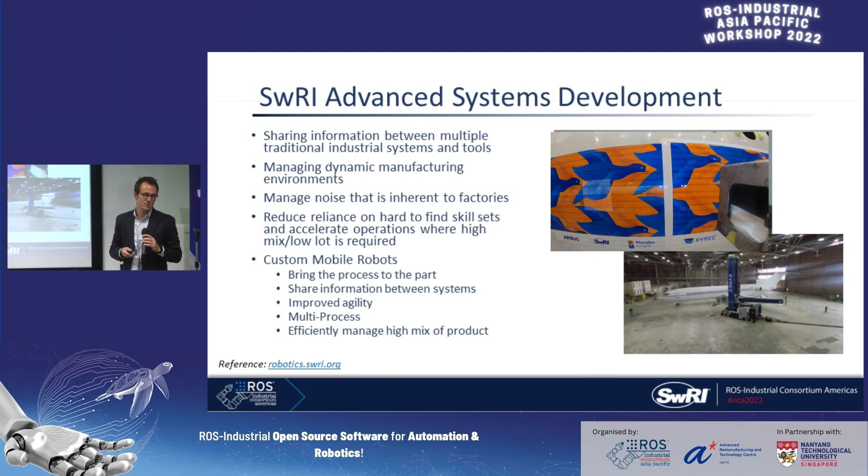like New Horizons. Relative to Southwest Research Institute and robotics, the group I work in focuses on advanced system development. You may have heard ROS-Industrial is 10 years old, and it was actually building a lot of these high-end and high-performing systems, or systems that have to do a lot of interesting things in dynamic environments, that led our group to investigate ROS as a solution. And that was actually the birth of the ROS-Industrial program.

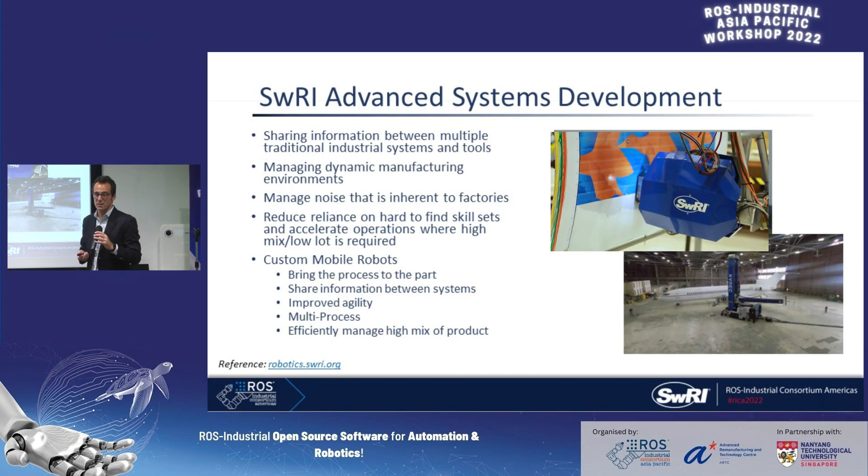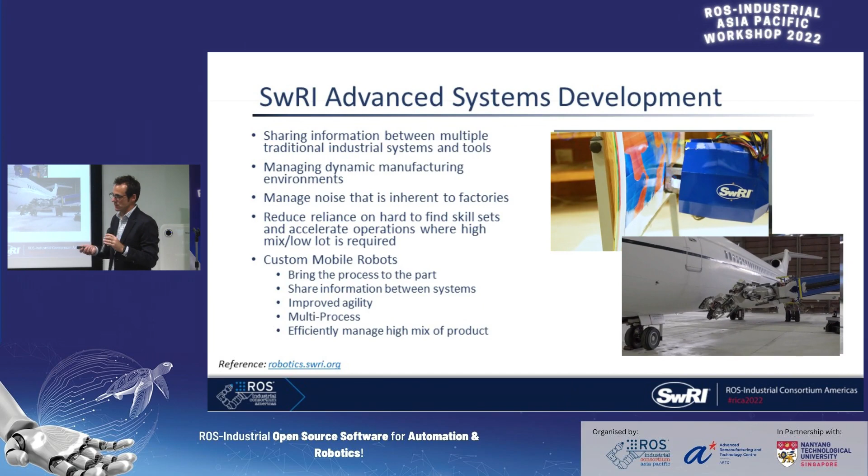So these are just a couple examples. Inkjet printing on aircraft surfaces, and this is laser ablation, basically coating removal for aircraft. It's basically a lot of the core work that our team does. We take advantage of the tools in ROS and give back as well. So we try to walk the talk, if you will. So that's what our team does.

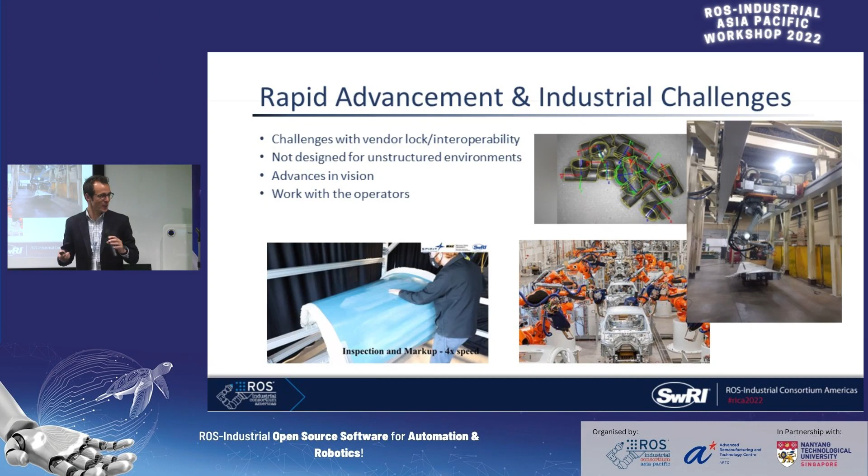We've heard a lot about it, I don't need to belabor these points. We've heard about vendor lock. We've heard about advances in AI and vision, and obviously people wanting systems that work more efficiently with and around people. So one of the things we've tried to do is develop solutions that do these sorts of things. And I think this community here in Asia Pacific and our broader ROS-Industrial community all have those same things. Let's take advantage of advancements. Let's enable new applications, but we need to be cognizant that people still do good things, and the systems have to work well with people.

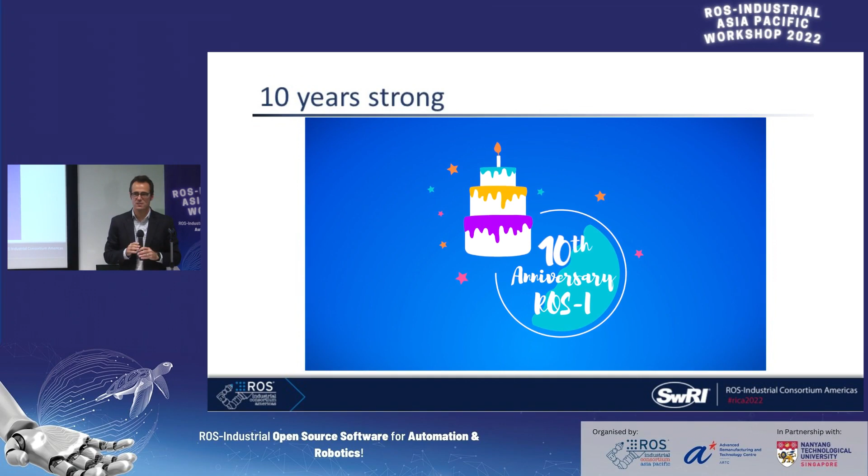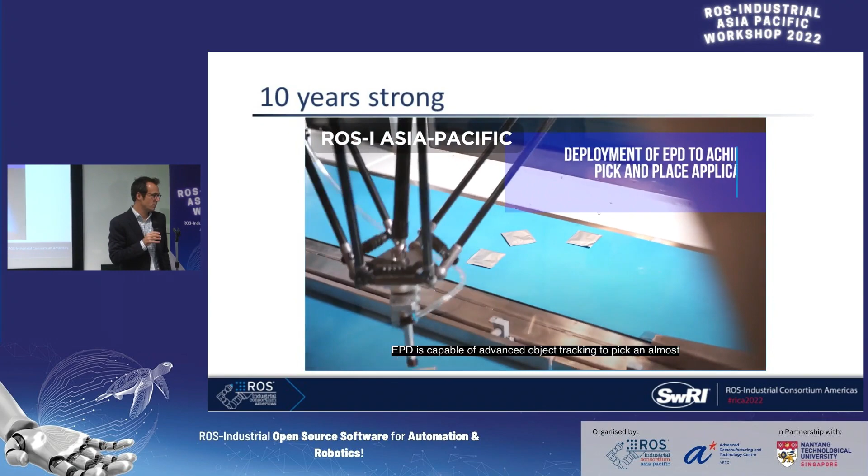And as you heard, ROS-I is 10 years old. So thank you to our friends here at Asia Pacific and members and university partners for providing content for our 10-year mashup. A number of you may recognize a number of these applications. It's really great to have a thriving ecosystem.

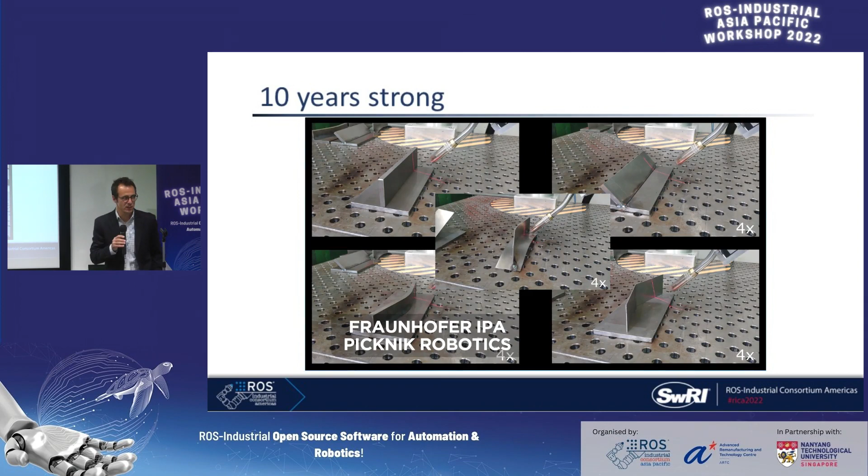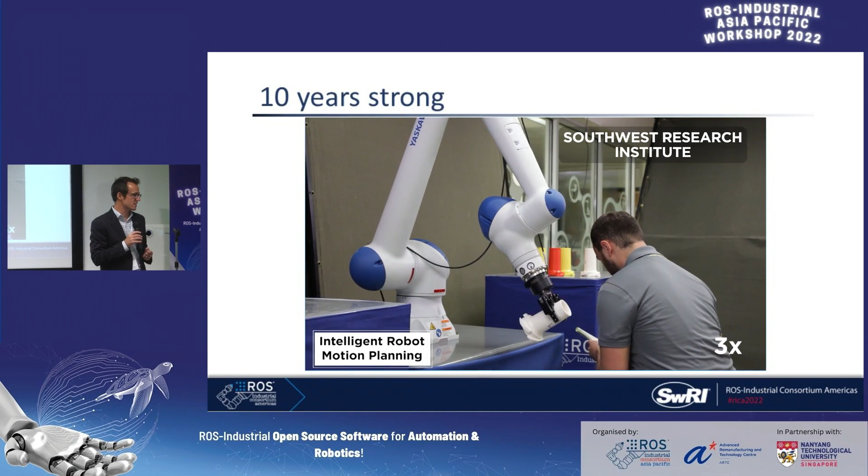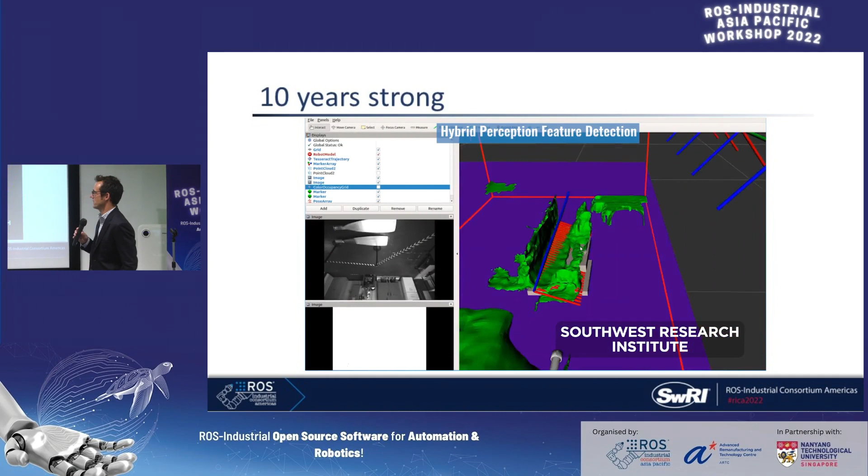For the Consortium in the Americas, it's very valuable when you have a number of people willing to tell you everything that's missing, what's not working, and how you can do better. That's invaluable. That's how we get better: having get-togethers like this, talking about challenges and what's missing, doing new work, providing new resources, and then getting feedback on those new resources. And this highlights a number of the different applications we've worked on as a global team.

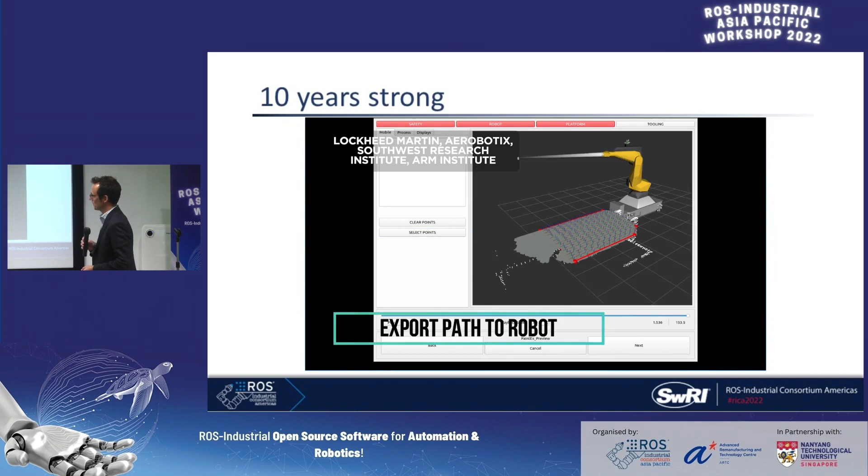And it's an FCI video we talked about, Christoph. Anyways, a number of neat applications.

I think Daryl did a great job of bringing up the member map. But what's really key, and it's true for us as it is for Daryl and, after me, Christoph, is that it has to inform what we do. We've heard about interoperability. Lo and behold, interoperability is one of our four main thrusts. Obviously, we're very concerned about human interface and reaction. But ease of use is something we get asked about quite a bit.

We were talking earlier about working with containers and building from source to facilitate ROS 2 Humble bridging. And no, that's not easy. So we want to focus on those, and provide tools that actually make these resources easier to take advantage of. It's really important. More recently in the Americas, we've really thought hard about what to do about ROS 1 and ROS 2.

So we have the benefit of having been doing this ROS thing for 10 years. And what comes with that is we have some deployed systems that have been running around since 2014, right? And they're still working, right? I may have gotten rid of that slide, but there's an article about it. I can steer you to it if you're curious. Spirit AeroSystems has been talking about that work recently.

But it's working, it's running in production. Why would they even bother porting it, right? It's not connected to the internet, it just runs. But if there is an issue, or if they want to take advantage of a new motion planner, how do we help them out? If we totally just move to ROS 2 and never look back, how do we help those folks? So this is something that we've put some thought into, and where possible, we're asking ourselves what

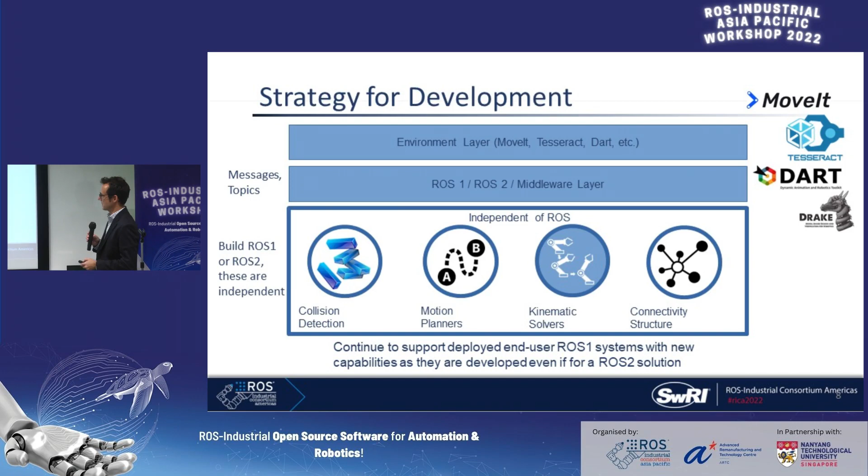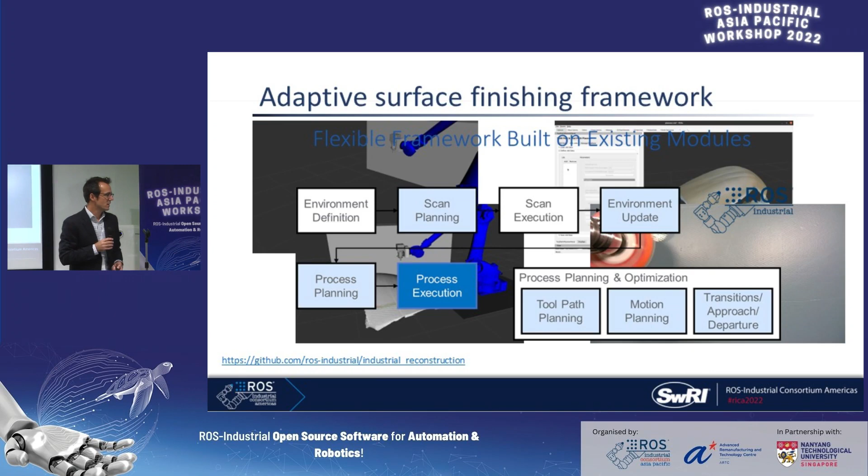And of course, then we put in representative classifiers for how to implement, say, TensorFlow to do process classification. So we work hard to provide frameworks or example implementations to give our audience, our members, something to poke at, if you will. And that's been well received. We've recently turned this into a workshop. You'll notice the GitHub repo is there. We do try to share information. We also hosted a developers meeting where we reviewed this teaching application.

We've turned it into a demo that was showcased in Detroit at Automate last June. It originally started off as a 2021 ROSCon workshop where everyone got online and tried to build this in an AWS EC2 instance. It was fun. But since then, our goal is to turn this into an advanced topic for our ROS-Industrial member training on how to build a whole motion planning pipeline, leveraging optimization-based motion planning and some of the other tools in the toolbox for how we do process planning, i.e. adding approaches and departures, et cetera. So we look forward to offering that.

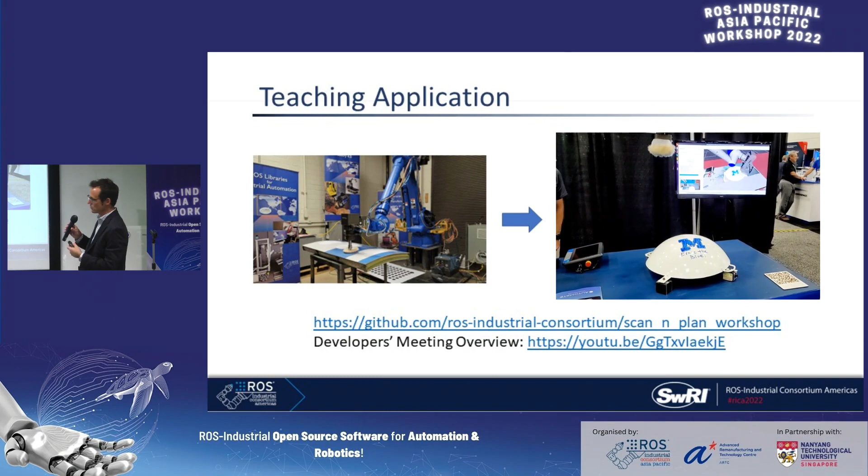This is the demo. That's me running the demo at 2x speed. Right, so here we enable people to position said part. I drew this particular doodle, and then you'll notice when it does, it does a 3D reconstruction that's a colorized mesh.

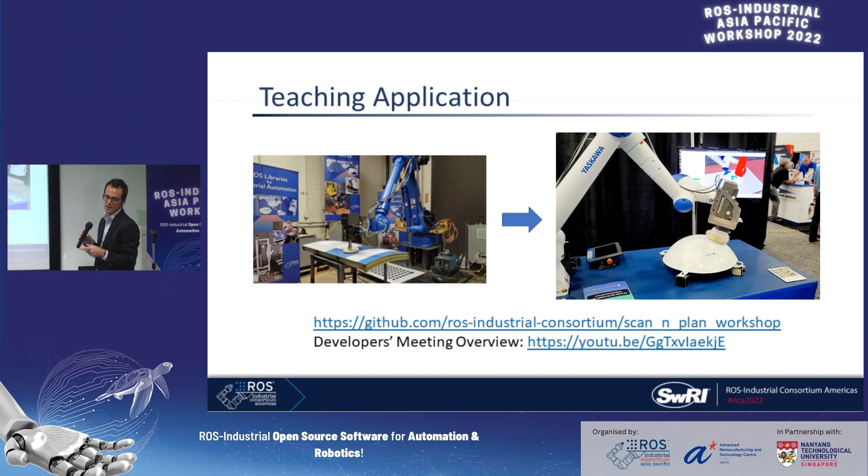So we can either do classifier and generate toolpaths based on the classification, or we enable a user to draw on it and it rasters within the drawn region. So you can see here I did not select it very well. But that is an example of that framework and turning it in and making it available for users to play with.

We talk a little bit about, and I know Daryl's very excited, and the whole AP team here is to have you here. And one of the things they want is this sort of feedback. So we had our big annual meeting in June, co-located with Automate in Detroit, and Christoph was kind enough to stand there at different whiteboards and provide feedback. And these are sort of some of the things we've got feedback on.

We had separate conversations in working groups on training and resources, roadblocks to adoption. Like, hey, why aren't more people picking up these things, right? I think I've heard a lot about OpenRMF. I'm really excited about it. But like, what can we do to accelerate? What are people thinking? What have people read about it? Probably haven't even really experimented yet. Right? What are these things that are roadblocks to adoption?

We've been asking that about our ROS-Industrial community. We're very beneficial that our consortium has a lot of opinions. They're very happy to tell us what's not working. They have a lot of questions about DDS and DDS tuning. We have a lot of opportunities there. And so this feedback basically drives what we have to do this next year, right?

So we're trying to work hard and put some really hard thought into basically digestible nuggets to help people get up to speed, right? What are some other resources to provide guidance on DDS selection, DDS tuning? What are some other different things relative to these different audiences? I think much like here in this room, we have a ton of different stakeholders, right? It's not just developers, it's not just end users, it's not people building robots. There's even a few others that we end up interacting with or have questions. How do we service those people? And that's something we're also very excited about.

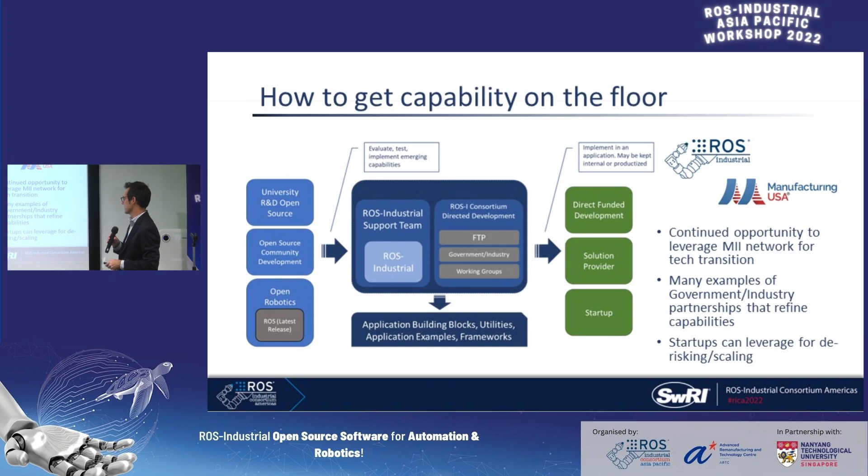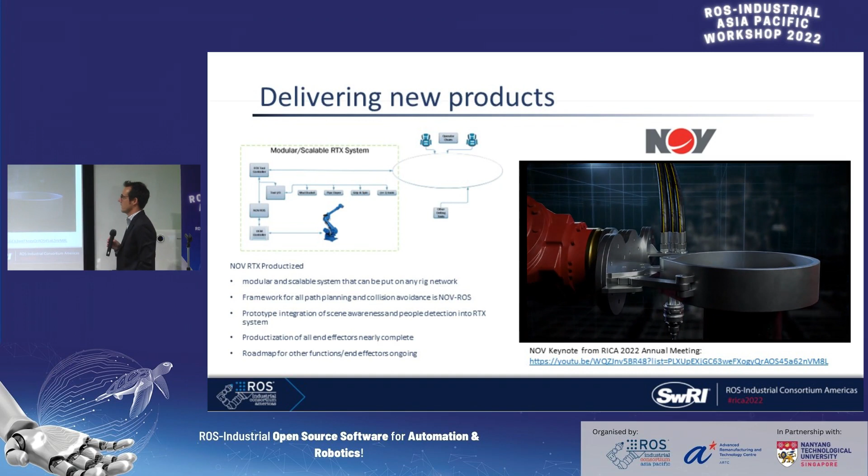So one thing that I heard, oil and gas came up, in oil rig operations. We were very fortunate that National Oilwell Varco, NOV, keynoted our ROS-Industrial conference. I usually try to find keynotes where it's industry doing something interesting, leveraging open source, and ideally even giving something back. In this particular case, NOV was really interested in using industrial robots for their tripping operation.

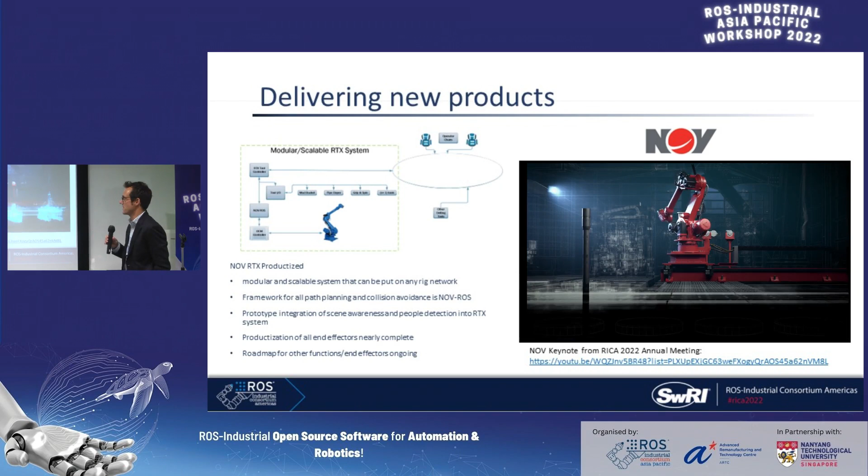Tripping is basically where they're pulling all the segmented pipe out of the ground. It has to be unthreaded and then set aside, or the inverse, put back in and threaded on and fed in. People traditionally do this role on the rig platform floor, and it's very dangerous and very dirty. So they were working with an industrial OEM provider. You can probably figure it out from the picture on the left. We supported them a little bit, but they've been ROS-I full members for a long time.

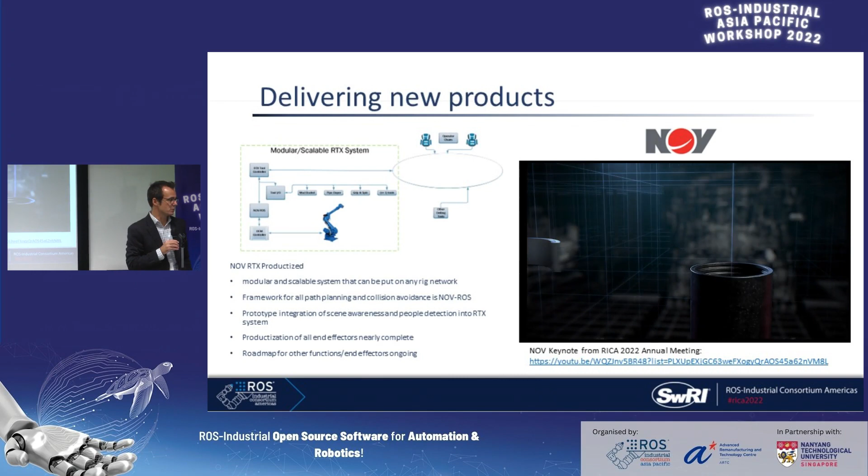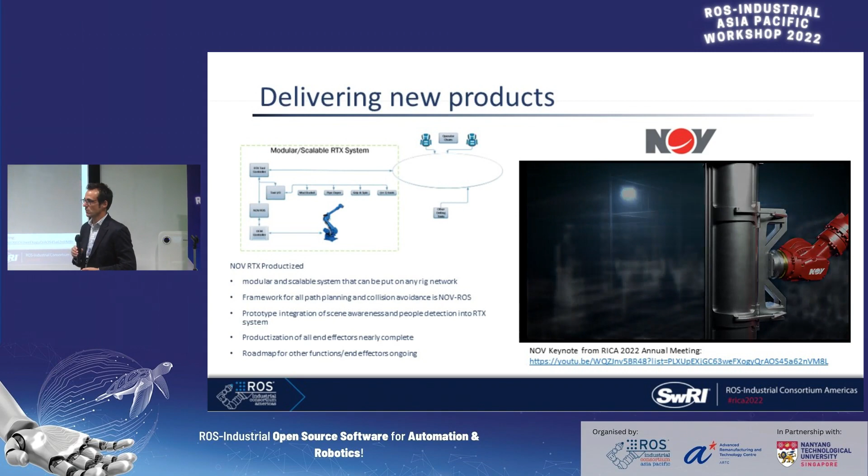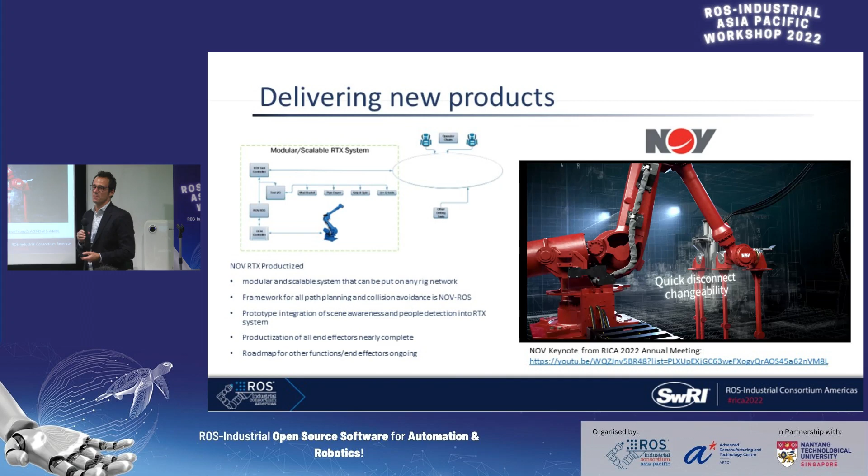They just recently, hence this snazzy video, released a product. And they're happy to advertise that ROS enabled them to realize this capability. They are now offering this as a solution that interacts with their proprietary software. So it's a great story of an end user with a problem, not having to start at zero, taking advantage of open source tools, yet realizing interoperability with their proprietary software stack. So this is great fodder for a keynote at my ROS-I conference. But all joking aside, this is why we do this work, right? To enable new capabilities, taking research and deploying it.

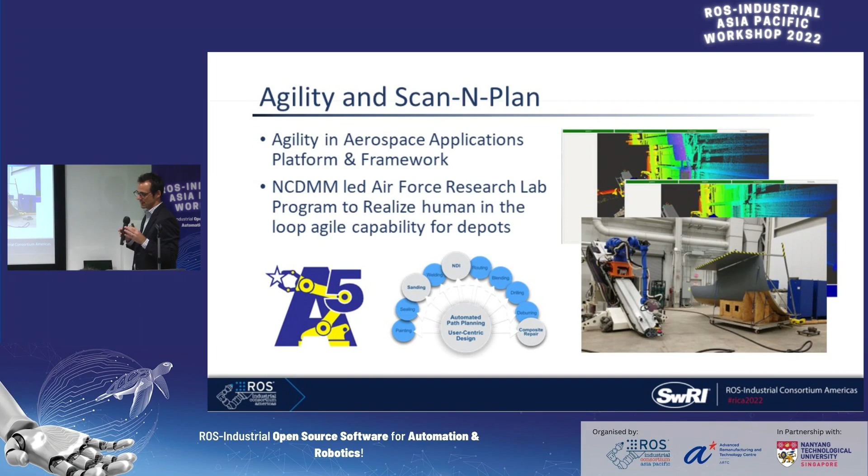The other thing I want to talk a little bit about is some other work. There's a big push on agility. This is the A5 program. It does all kinds of work where it'll reconstruct its environment. The user can say, yeah, that's interesting. It'll then plan and then do some sanding. What's really exciting about this, we've put a lot of work in this framework. This is basically the pilot of this notion of providing frameworks.

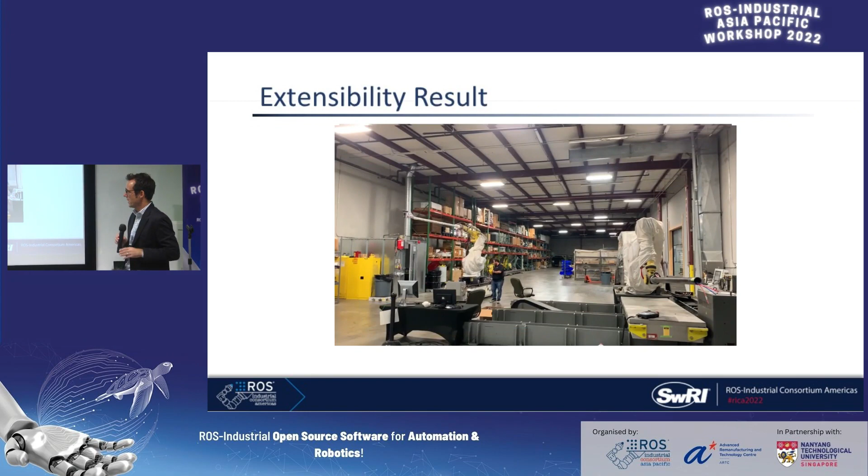And so again, leveraging our relationship with the Manufacturing Innovation Institute, ARM Institute, which focuses on advanced robotics for manufacturing, we had two chances to extend that A5 framework into two new applications. One of them was painting. Lockheed Martin was the prime on this particular project. We worked with an integrator or solution provider, Aerobotix. They're hoping to adopt this capability and sell systems to all kinds of people. So now we have a pathway to sustainment.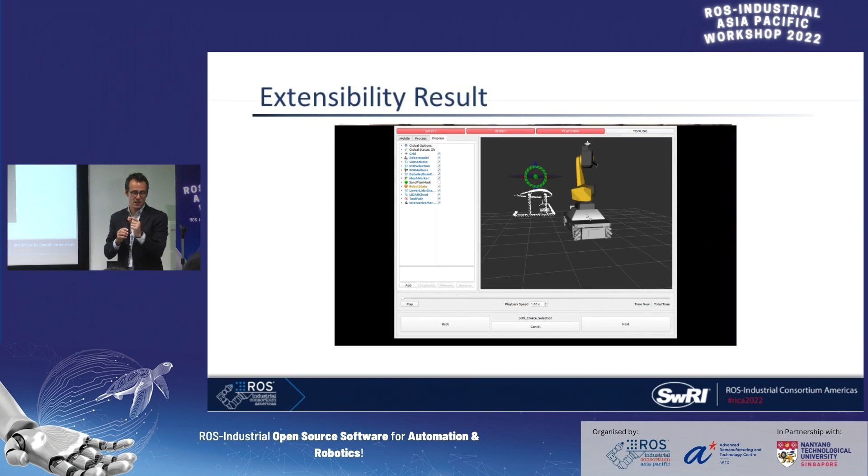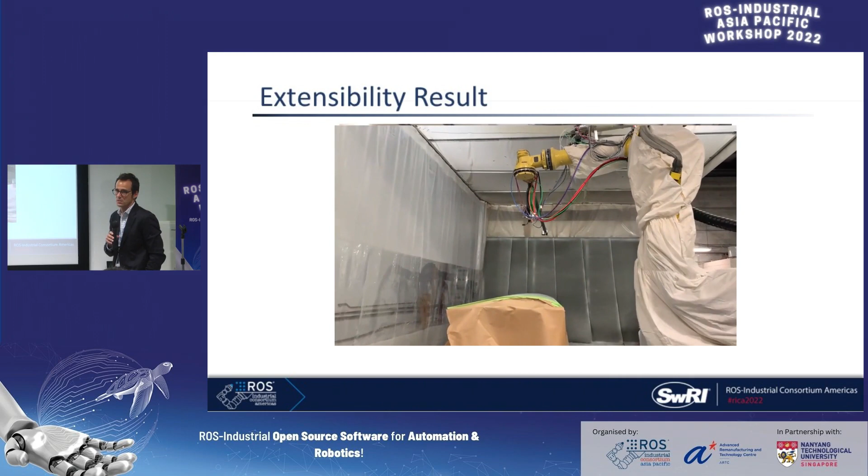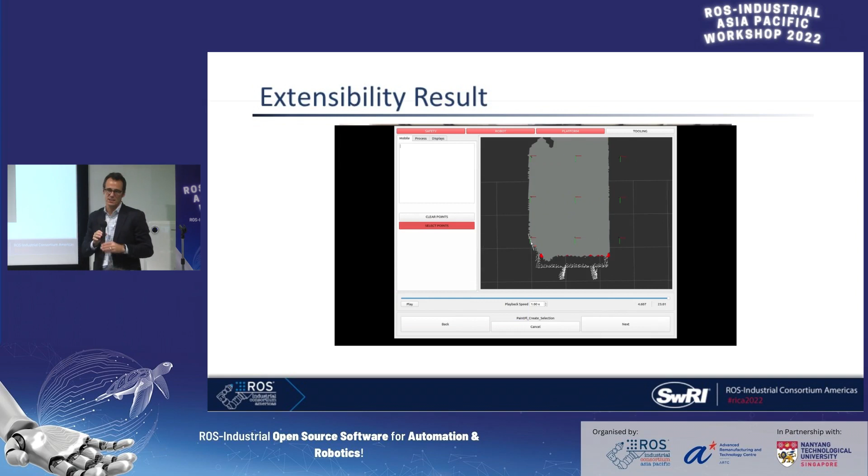We have a hungry end user. Lockheed Martin has to paint all kinds of different aircraft parts. Aerobotix is really happy to offer a new capability to customers. And they don't have to start at zero because they can take advantage of an existing framework and, of course, all the stuff in the ROS ecosystem. So this is an example where, due to some engineering not done, you can see how far the paint gun has to be because the robot itself is not paint rated. So we had to extend the boom out.

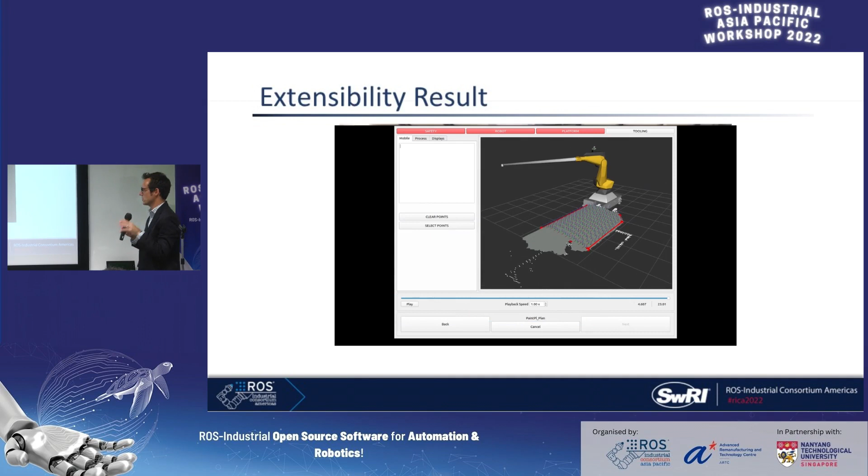But this is basically that same framework where an operator can sit there and say, yeah, use that surface. Yeah, that looks good. Motion plan it. And then it's off to the races.

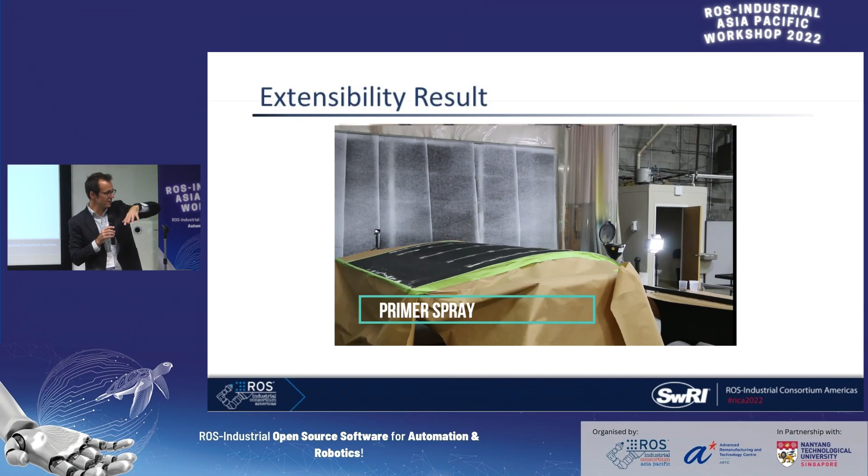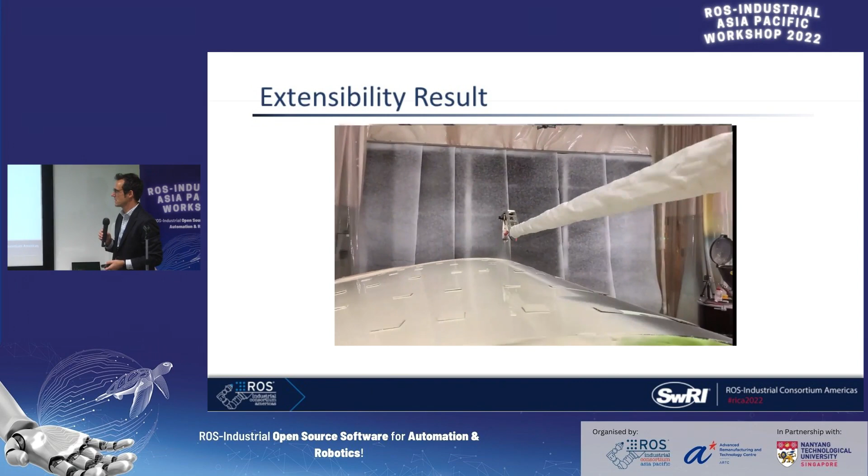And so this is a really great example of taking basically this; we were able to convert it from the A5 platform you saw before, where it was a big blue robot on an angle doing different kinds of aircraft, to this different platform in around 3 months, right? And now we're actually making aerospace certifiable coatings. The big limitation here is they're constrained by the reach of the robot, because this particular platform can't do coordinated motion, so I can't do extended, but that work is on its way, so stay tuned.

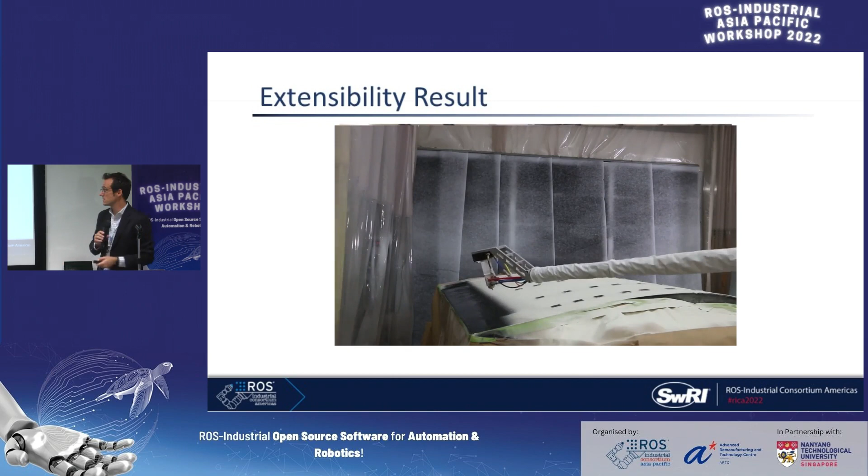But the question is, can ROS-Industrial help us create an extensible framework that handles all the communication with the robot, task abstraction, but then allows researchers to focus on just testing the transferability of their reinforcement learning algorithms? And that's the contact framework. We've since taken this framework and are actually doing real assembly applications with it, because along the way, we had to have a couple of reinforcement learning algorithms to test how this worked. But it's turned out to be a really interesting approach.

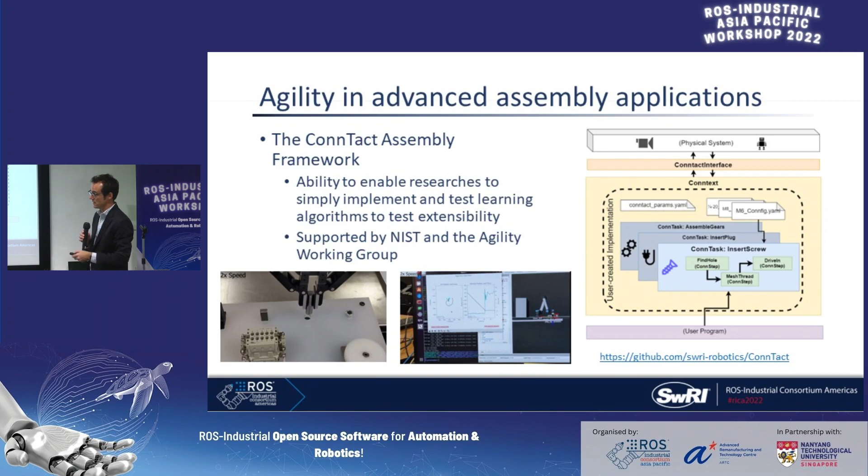But basically, the idea is that we can actually go across a couple of the different assembly types and verify or assess the performance of reinforcement learning algorithms. And we've had a couple of universities pick this up and provide some feedback. NIST is now up and running with this, and we're porting it to ROS2 currently.

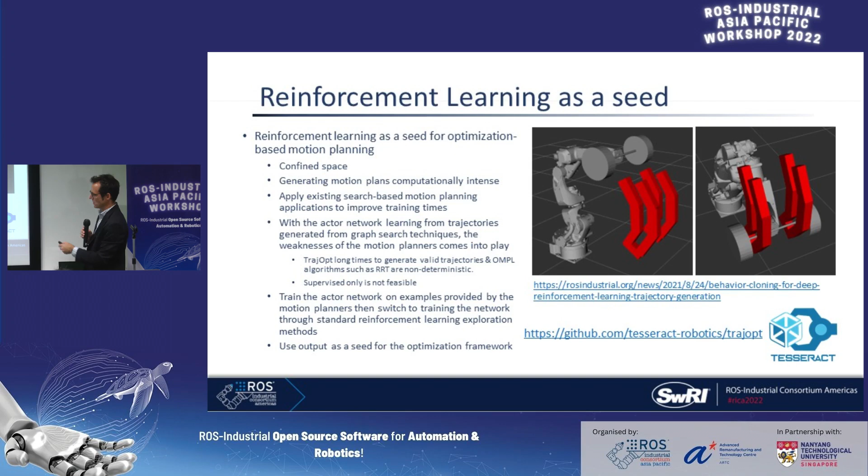Reinforcement learning as a seed. I had a few people ask me about TrajOpt and optimization-based motion planning. Well, one thing we learned is that in certain cases, depending how you architect your system, reinforcement learning is great as a seed for your optimization-based motion planning. So we've done a lot of work there. There's some example write-ups on how to build that, and of course, the implementation we use in Tesseract. So that's been really exciting work.

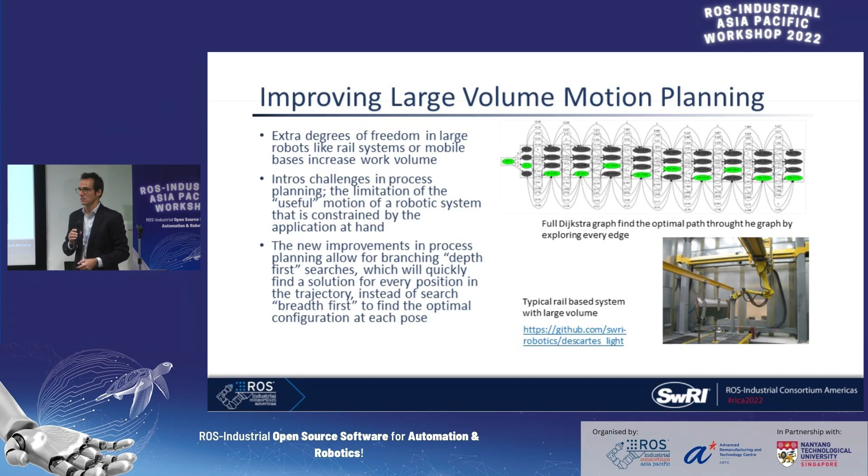We've been doing a lot of work on improving performance in Cartesian motion planning. A number of you may have heard of Descartes, the Cartesian motion planner. If you're trying to do anything on a surface or in Cartesian space, you'll run into Descartes. But Descartes Light, you'll see there, I don't think it's moved over to ROS-Industrial quite yet, is a new implementation that really accelerates the planning time to get your motion plan solution. So feel free to check that out.

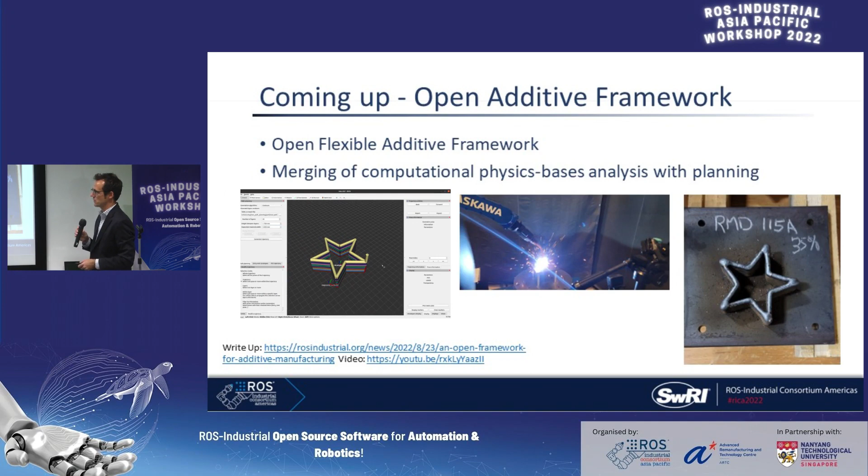We've been working on additive manufacturing. We get a lot of inquiries like, I'm tired of hopping between 6 different software environments to do my motion planning for additive manufacturing. What can ROS do? So we were working with Yaskawa, and we have a couple other interested parties, to build on some prior ROS-Industrial work and extend it to create a full motion planning pipeline for additive manufacturing. We did some preliminary testing and shared some results across our membership, and we hope to get something going soon.

Another thing that's going on is optimized toolpaths for tracking accuracy and velocity. This is a big deal if you're doing real precision additive manufacturing, and you need to track along, say, the edge of a turbine blade. The robot controller will make trade-offs on velocity and/or positional accuracy. So what can we do to the toolpath to improve that performance?

This does basically an optimization of the input toolpath and is fed to your motion planner. So this is all up front. There's a phase 2 that's going to focus on closed looping that.

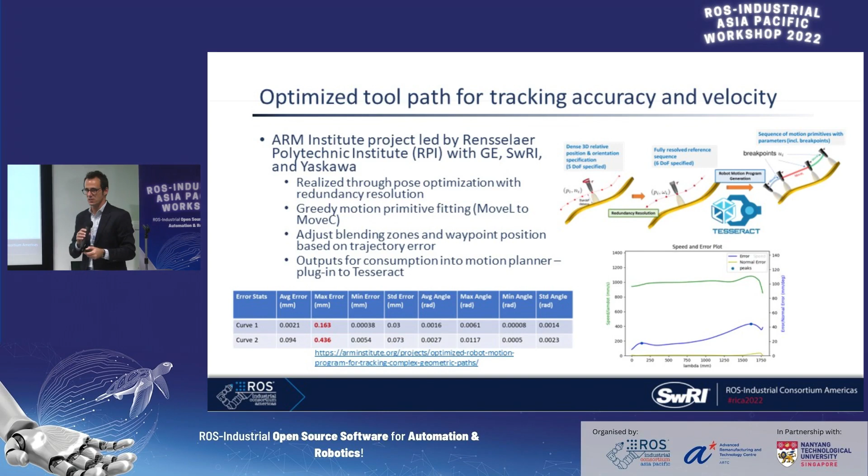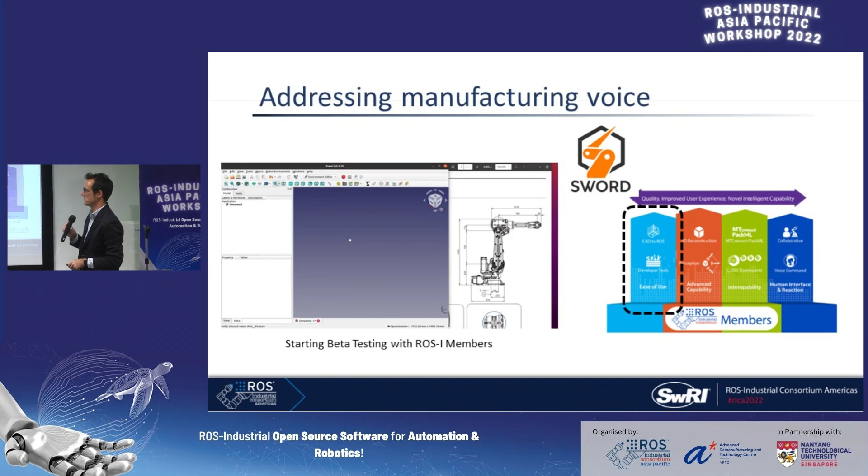One other thing that's going on in the ROS-Industrial Americas space specifically is addressing ease of use. For instance, Fraunhofer IPA, thank you, is going to be part of a pilot where we basically are providing a module that plugs into FreeCAD to enable more efficient setup and tuning of work cells. So this will include the creation of the URDF as well as assessment of toolpath planning and some other fun things to do in getting your system set up.

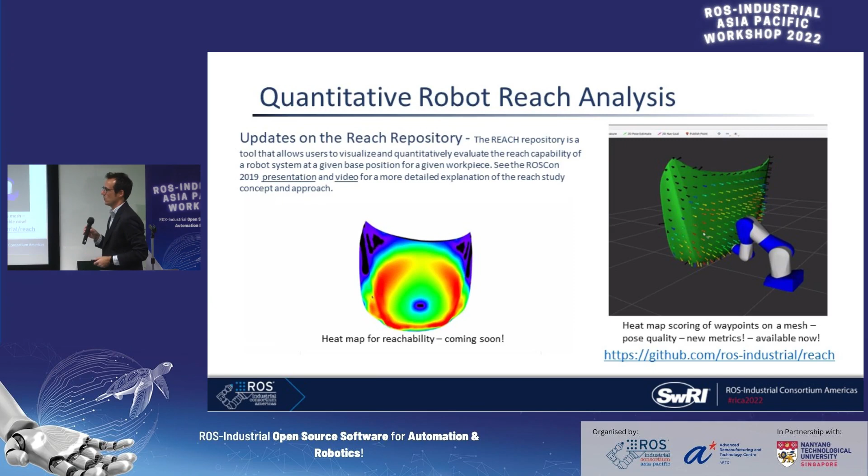The other thing we just had a big developer meeting on is Reach. Reach is a quantitative analysis tool for how your robot can access different things. There are some links here, including a link to the repo. Coming soon is also a heat map for reachability. So when you're going to design your system, or you need an input because you have a mobile system that you want to be able to process as much as you can from different poses, this is how this tool came to be. So we're very excited to offer that up to the community.

That's it. I just wanted to cover a few things we're offering up to the community, why we are, and how it ties to the feedback we get from our consortium members. If you have questions, comments or feedback, things we can be contributing that benefit this specific community, I'm all ears. I'm here. Thanks. Do we have time for questions?